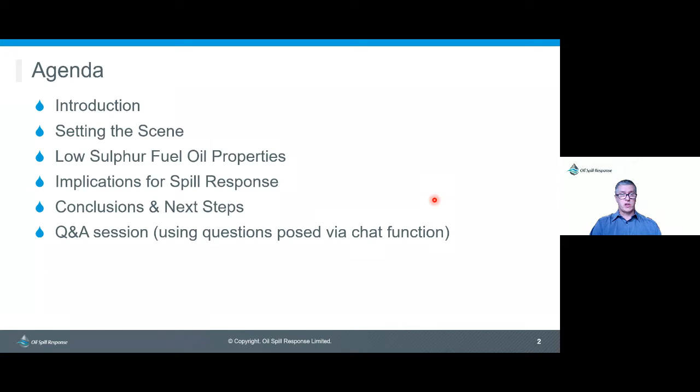Good afternoon, everybody. My presentation is based on 6 different parts. I'll give you a very brief introduction to start off with, say a few words about OSRL before setting the scene. And then moving on to the main thrust of the presentation, which is talking some more about the low sulfur fuel oil properties and also the implications in terms of spill response. We'll then wrap up with some conclusions and next steps. I've put the questions at the bottom there, but we'll take questions after all of the presentations at the end of the session. So thanking you in anticipation.

Just a very quick introduction to oil spill response, just to say a few words about OSRL in the introduction, but also to look back at the first webinar that we gave back in November. This is actually the second webinar that's been organised by OSRL. The previous one included an excellent presentation by Sintef that explained the weathering properties of new generation low sulfur fuel oils based on work that had been undertaken up to that point. And it was clear from the ensuing discussions that there was a lot of interest in the topic and certainly a lot of questions. What we'd like to try and do is build up from that previous seminar, but in a sense also take a step back and look more closely at the properties and characteristics of low sulfur fuel oils based on data that's been gathered through 2020. I hope you find today's webinar instructive, informative. This is very much about dialogue and collaboration, and hopefully we can continue in that spirit.

Just a very few words about oil spill response. I think most of you probably know who we are. We're the largest international industry-funded cooperative out there, owned by the major oil and gas production and transportation companies.

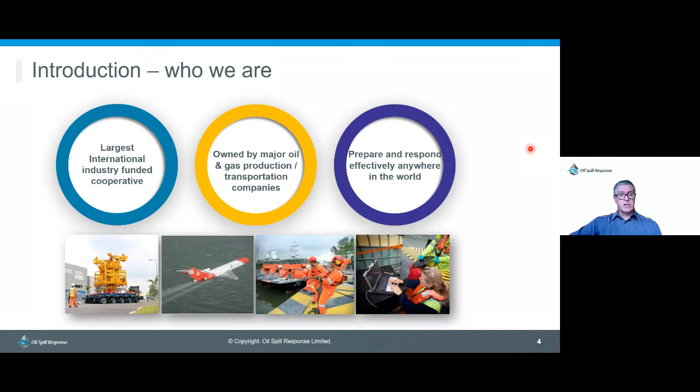Now, as I mentioned earlier, this is the second webinar, but before we go any further, I just wanted to acknowledge that there have been some other very good webinars out there, and I'm thinking particularly of those organised by the UK and Ireland Spill Association that focus on the MV Wakashio, the spill in Mauritius. There were some very good guest speakers indeed from CEDRE, amongst others. So I just wanted to highlight that there's some other good stuff out there as well.

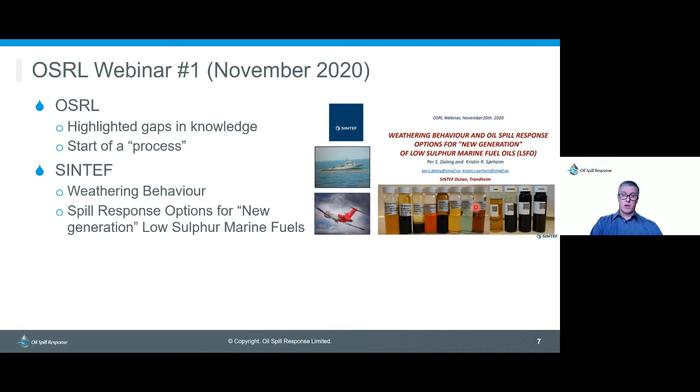In the first webinar, OSRL and SINTEF presented, and I'd like to draw on 2 specific things from that first webinar. Firstly, what we're talking about when we refer to low sulphur fuel oil. This is a slide that I borrowed from Per Daling's excellent SINTEF presentation in the first webinar, so thank you, Per. This basically shows that when we talk about low sulphur fuel oil, we're not talking about one single thing.

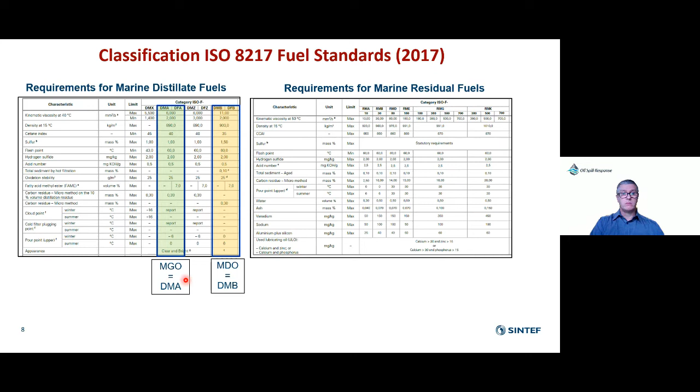On the left-hand side here, you can see the different marine distillate fuels that can be found. On the right-hand side, we have the marine residual fuels. When you think of marine gas oil, marine diesel, you can see where they sit within the distillate fuels. And when we think of the heavier, more traditional heavy fuel oils, the IFO 180, IFO 380, this is where they sit in the grand scheme of things on this side of the residual fuel oil specification.

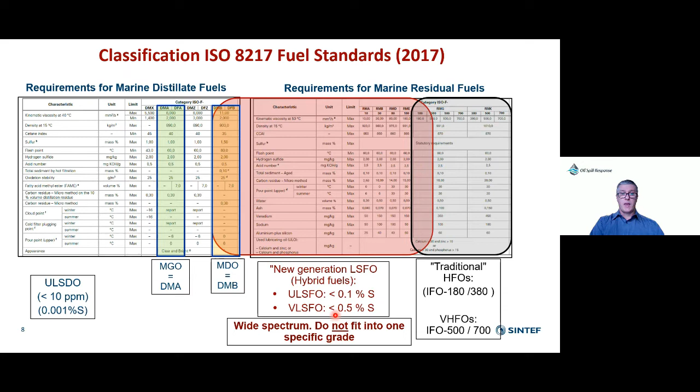But when we talk about the new generation low sulphur fuel oils, we can see what a broad spectrum, what a wide range this potentially encompasses - we're talking low sulphur fuel oil, ultra low sulphur fuel oil and very low sulphur fuel oil here. Clearly you can see it's not a single entity, not a single thing, and not one amorphous substance, as we can see from that particular slide.

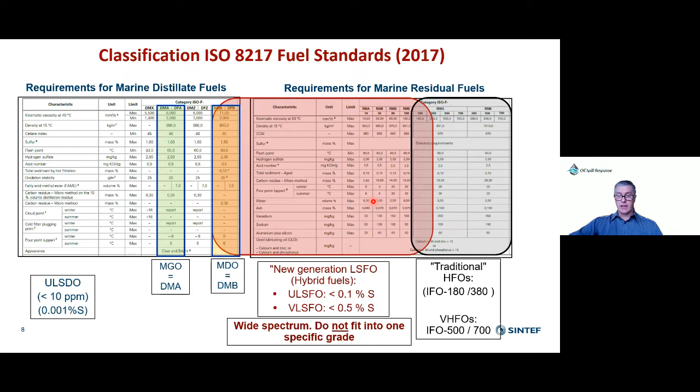The other thing I wanted to show you was that in the first webinar we had many questions, and this is a collection of those questions. I wanted to reassure people that your questions don't just disappear into a black hole - we do make note of the questions. Obviously we try to answer as many as we can during the webinar, but there were so many last time that wasn't possible. I went through all the questions and was able to break them down into 4 different categories: questions about response, questions about behaviour, questions about environmental impacts, and other. Most of those other questions related in some way, shape or form to collaboration, and clearly that's what we're trying to do in this series of webinars, is to build upon that.

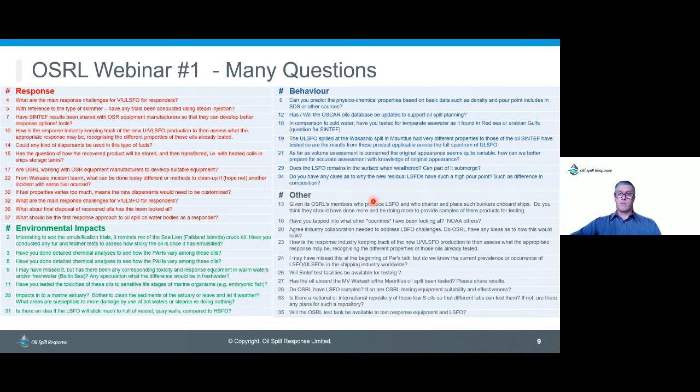Now, we've tried to take account of these different questions in my presentation, but also that's one of the specific reasons why we're so pleased to have the Norwegian Coastal Administration and Cedre talking about the work they are currently doing, because it does touch upon all of those subject areas. So I just wanted to say that before we get into the main thrust of the current presentation.

Okay, so what I'd like to do now is just set the scene and establish, when we talk about low sulphur fuel oil, how big a deal, how big an issue is it? In terms of volumes, there are various figures from different sources, but a figure I found from the International Energy Agency was around 221 million metric tons per year.

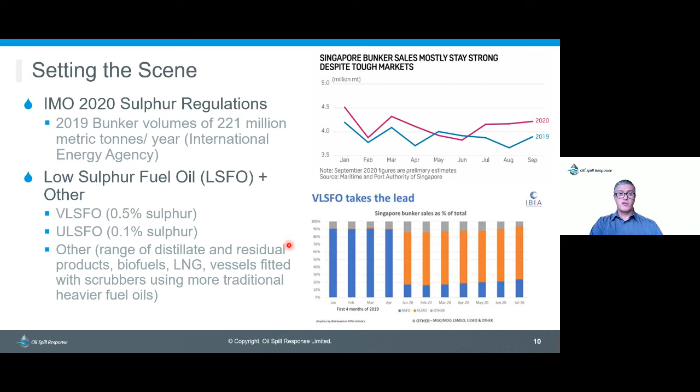But let's not forget, and this is something we need to be mindful of in terms of spill response and preparedness, that there are other fuels that could be carried as bunkers. This presentation is more about low sulphur fuel oils, but from a holistic point of view, we shouldn't forget there are other more traditional heavy fuel oils still carried, because vessels could be fitted with scrubbers - other means of compliance with the sulphur regulations introduced in 2020. So it's just to make sure we keep our eye on the ball, that we are prepared for all scenarios.

I'd like to now talk a little bit about the properties and characteristics based on the results we've collected through 2020. I'd like to pass a very big thanks to VeriFuel, Rob Leventhal, who very kindly shared a lot of data with us and was very sympathetic to my numerous requests. So thank you to them.

Basically what we have here is I focused on some of the parameters that are of particular relevance from an oil spill perspective. The tests are according to ISO 8217, and as we supposed, the results have confirmed there's a very broad spectrum of results and properties with the very low sulphur fuel oils. I've concentrated on three parameters here: viscosity, density, and pour point. We have information for very low sulphur fuel oil, but I've also included some information for high sulphur fuel oil and marine gas oil, just as a comparison, for context.

I'm sure most of you know what these properties are, but viscosity is basically the internal resistance to flow - how easily does a material flow, is it liquid or not. The one thing to note is that the viscosity is quoted at 50 degrees Celsius.

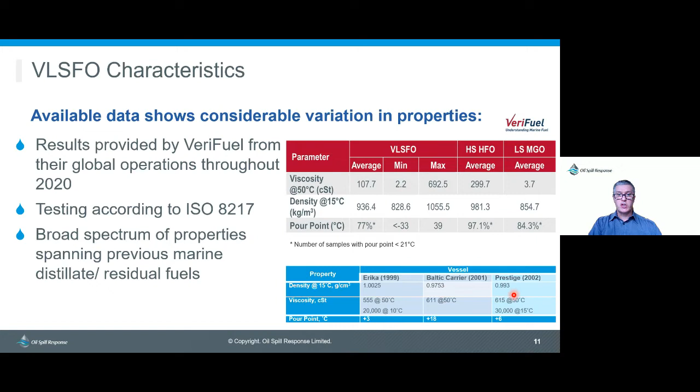But for me, what's also very interesting is the pour points. If you look at the pour point from the Baltic Carrier spill, that's around +18 degrees C. When that actually hit the cold waters off the Danish coast of around 5 degrees C, the oil took on a chewing gum, more viscous character, because it was below that pour point. I point that out because it's a particularly interesting feature and makes it slightly different from the Erika and the Prestige, which had lower pour points.

So I'd like to look at the viscosity and pour point data in a bit more detail. On this graphic I've got a set of viscosity curves on the left-hand side and the pour point data on the right. If we focus first on the viscosity data, we have a series of different suppliers from different parts of the world showing how viscosity varied throughout 2020.

If we start at the bottom left with supplier 4, we can see the viscosity is actually pretty low, pretty stable - you'd wonder what all the fuss was about. There's a slight variation towards the end of the year, but by and large, pretty low, pretty consistent. And the same story with supplier 5 here - a couple of peaks and a bit of an upturn, but generally a pretty consistent viscosity throughout the year.

But then when we contrast that with supplier 1, supplier 2 and supplier 6, we can see a much more varied picture - viscosities from down around 20, but also up over 300. Interestingly, we get the same picture with supplier 2, and also very interesting is supplier 6, because supplier 5 and supplier 6 are both Singapore. But whereas supplier 5 has relatively low and consistent results, supplier 6 has a much more varied picture that can vary considerably from operation to operation. Same part of the world, but a very different picture.

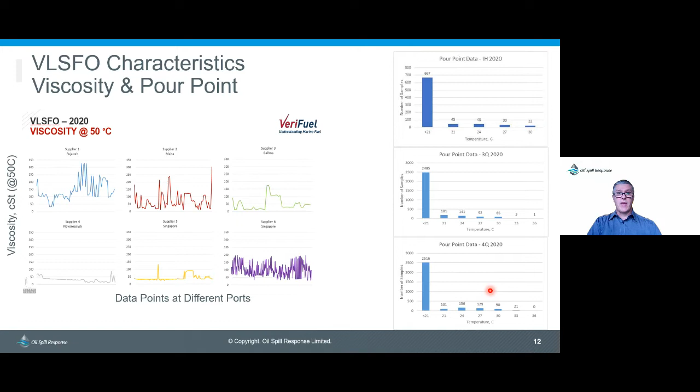Now, when we have an oil spill, the oil starts to undergo a series of processes collectively known as weathering. These can change the amount and character of the spilled oil. Some processes like evaporation cause a reduction in the volume of the oil. Other processes such as emulsification can cause an increase in the volume and also the viscosity of the pollutant.

Basically what's happening is that small droplets of water become emulsified and a stable water-in-oil emulsion is formed. This can in some cases be up to 80% water. So you can think of that as a very increased bulk - you're bulking up the amount of pollutant.

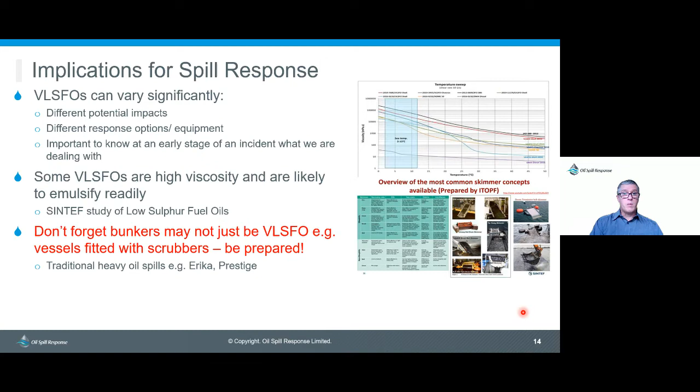So I think that's an interesting point, that there's a lot of work that has been done on these heavy oil skimmers in the past. But what we also know is that many of the very low sulfur fuel oils are much lighter. If we think of the MV Wakashio in Mauritius, for example, we've seen that some of the oils may be low in asphaltenes, and may not emulsify and weather to the extent we used to think about when talking about fuel oil.

In that particular case, the oil stayed at a very low viscosity for many weeks, and the type of skimmers that were working very well were skimmers that were suited for low viscosity oils. So some of the oils will not necessarily be the viscous oils that we used to think of with heavy fuel oils.

And we also need to bear in mind that very low sulfur fuel oils directionally may also be potentially waxy or paraffinic. These are the materials that tend to cause gelling with pour point, so we may find a possible temperature dependence. At warm temperatures the oil will be nice and fluid, it can pour, it can flow, but once the temperature drops, we may find the oil takes on a more solid or gel-like character.

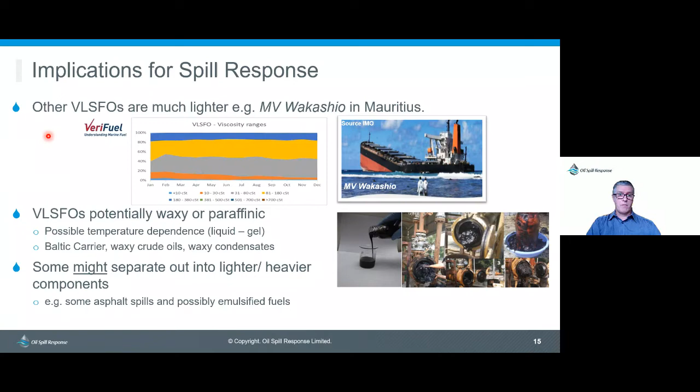All I'm trying to do with this particular slide is highlight the variability. They're not all the same. So that's, from an oil spill response perspective, something we have to take into account.

Now, if we think of containment and recovery, we've already seen that the very low sulfur fuel oils could be very different. You'd want to know at an early stage what you're dealing with, because you want to know which tools from the toolbox to apply. Not all skimmers work with all oils, so which type of skimmer would you need to use? Would you need to worry about viscous oil transfer or not? That will be very much determined by the viscosity of the oil and how it weathers.

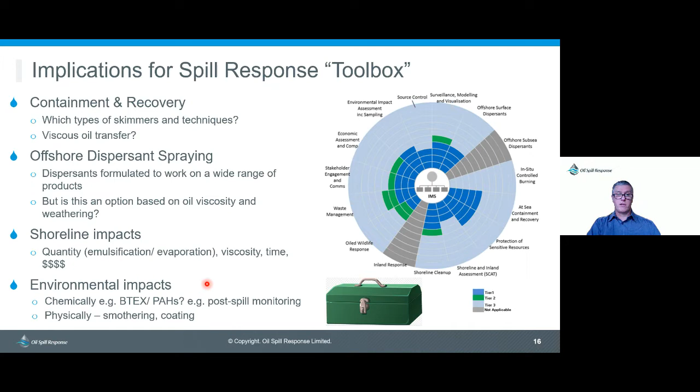So in conclusion, are all very low sulphur fuel oils the same? No, definitely not. Definitely not a case of one size fits all, and I think it would be wrong to adopt such an approach. I think we do have response tools in the armoury, but we need to know which ones are most appropriate, and of course we would be guided by NEBA and SIMA.

I think this second bullet point is very important to bear in mind, because if you have response inventories, if you've got equipment, if you've got STS operations, you want to know which equipment you should have and what its range of capabilities are, to make sure you're adequately covered. I don't think we need to start from scratch - we're not reinventing the wheel. A lot of work has been done, for example, with mechanical feeder skimmers.

What we need to do is not make any assumptions. We need to make sure that plans are fit for purpose, and that training and exercises are conducted. But we certainly don't have all of the answers. There's a need to verify, and there's always room for improvement and learning.

The spill that took place with the MV Wakashio, the lessons we can learn from that, for example. And I've found that industry has usually been very supportive.

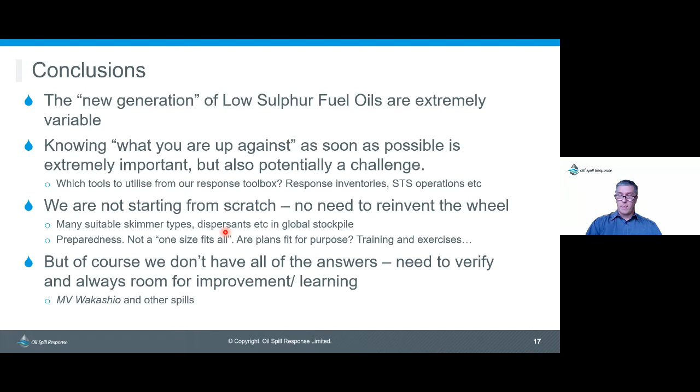In terms of next steps, OSRL's internal knowledge gathering and sharing is currently ongoing. We are very keen to maintain this dialogue and collaboration through this series of webinars, through talking to people like the Norwegian Coastal Administration and Cedre, but also with other governments and industry bodies, because it does have an impact in terms of preparedness and response across the board.

The IMAROS and the EPPR PAME projects are ongoing, and you'll hear a little more about those in the next presentations, as are other potential R&D projects. But as I mentioned, there are lessons we can learn and need to take into account - for example, that Cefas post-spill monitoring I mentioned, and the US work following Deepwater Horizon.

And of course, what we'd like to do is get your feedback after this webinar as to where we should go next. So do please keep in touch with us. Whilst we're not going to take questions right this second, we will take some at the end of the session. But as I said earlier, your questions won't disappear into a black hole. So thank you in anticipation for any feedback and comments you can give us.

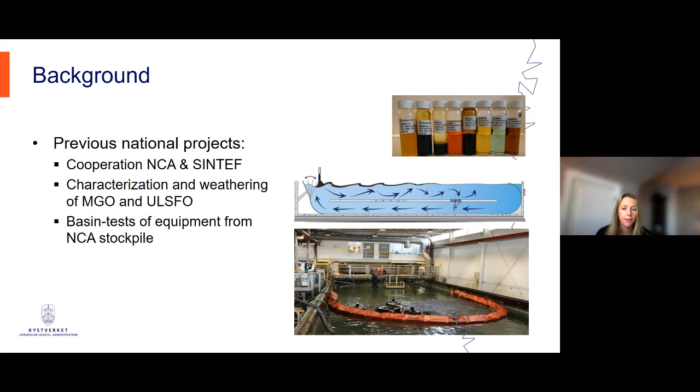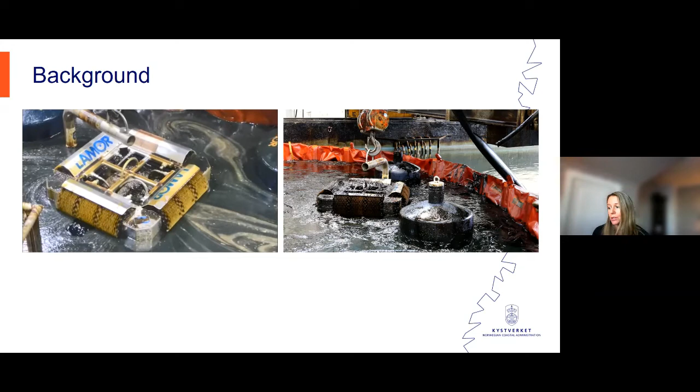So I would like to show you an example from this previous project, testing a brush skimmer in quite cold water in two different ULSFOs. You can see this one, it's flowing nicely into the skimmer. It's quite easy to recover. Everything is working fine. We're not dragging in a lot of water. So this is actually working quite well.

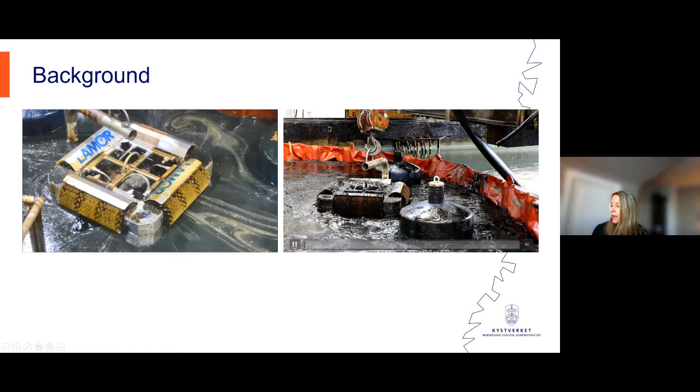On the other hand, there's another product. You can see that one here, and this is a product with a high pour point, so the viscosity should not be a problem for the skimmer. Actually, the pump is pumping the oil, that's not the issue, but the skimmer is actually just digging a hole into a semi-solid oil slick on the surface. So the flowing of the oil is actually the challenge here, and the pour point is really important in this case.

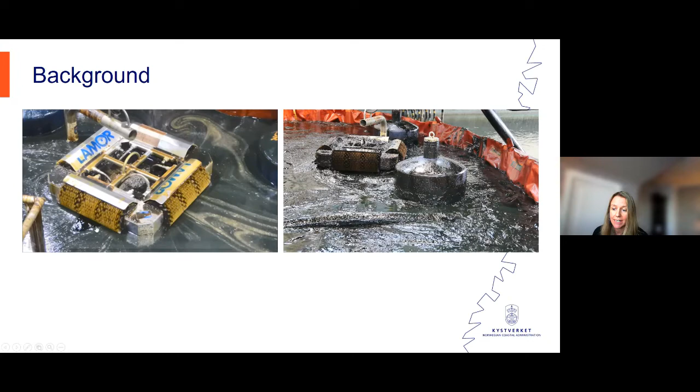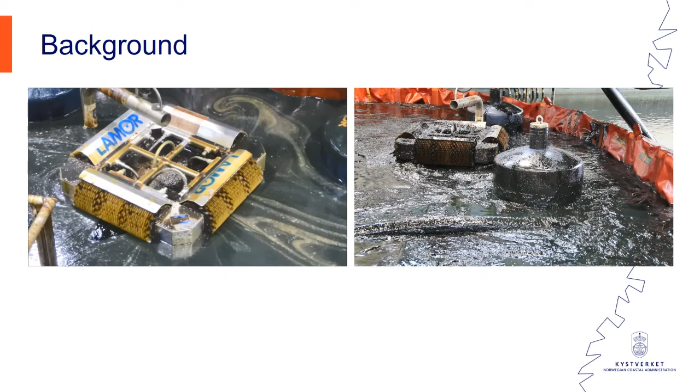Based on the results from these studies, we saw that we were scratching on the surface of something, and we identified a need for more experience and more data.

So this has been followed up in some national projects where we also looked into biodegradation of ULSFO and marine gas oil, shoreline interactions, and currently we are doing a little project on shoreline response where we test the efficiency of different washing techniques. This is a joint project between SINTEF and NCA, and it's about testing methods for cleaning on rocky shoreline involving also different cleaning agents.

However, it became quite clear that we cannot answer all our questions alone, so we wanted also to do some international collaboration on this subject.

One of the projects that we have taken the lead on is the project New Low Sulphur Fuels, Fate and Behavior in Cold Water Conditions. This is a project that is hosted by the Arctic Council and funded from there. Both PAME and EPPR are involved in this project.

Most Arctic states are engaged in the project. In addition, some observer states like Germany, China, Korea, and Singapore are participating. The objectives of this project is to identify the relevant fuel oils, which fuels are used in the Arctic, and also get a picture of the variability, and also, if possible, come up with some recommendation to the oil composition and also with regard to the environmental properties.

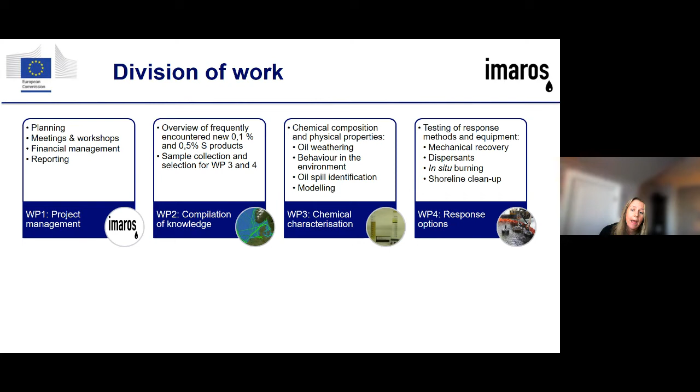This was planned as a 2-year project, but due to the situation this year, we are now working from the perspective of 6 months prolongation of the deadline of the project. We are now well into 2021, and of course the project management goes throughout the project.

The second work package with compilation of knowledge will be finished by this summer. We've started the chemical analysis part that will also continue until 2022. And the fourth work package, well, it will start this spring, but the main work will be undertaken this autumn and in winter 2022.

And we still hope to be able to have a final stakeholder meeting that is planned at the end of the project at our project partner in Malta, and that will be open also for interested parties outside the project group.

A little bit more detail on the work packages. Project management is my responsibility, and it basically speaks for itself—it's planning, meetings, workshops, reporting, finance. But the most important part, I think, is the cross-cutting activities in order to make the work packages fit nicely together and to put all the pieces of this big puzzle together.

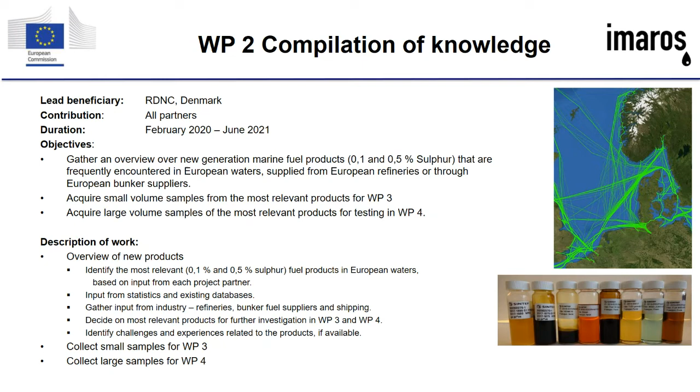So the chemical characterization—I think it has been made very clear how important the physical and chemical properties of the oils are. We will also look into oil weathering and toxicity in the water column.

Identification will be part of this work package, and also modeling. We don't want to create any new modeling tools, but we want to make sure the results from the projects are presented in a way that they can be used in already existing decision support tools, and make some recommendations with regard to best practice for modeling these new oils.

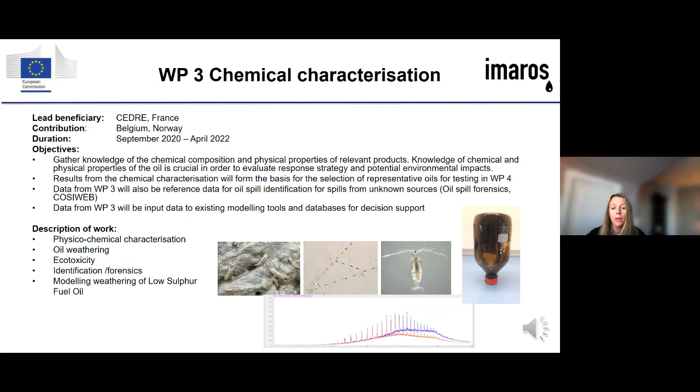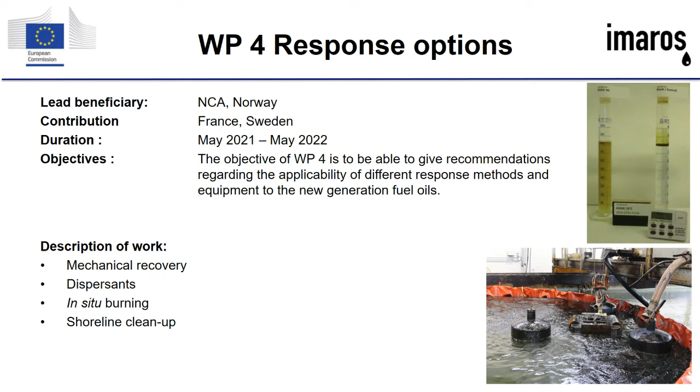Work package 4 is response options. We're looking at the whole toolbox: mechanical recovery, dispersants, in situ burning, and shoreline cleanup. Mechanical recovery is the main emphasis, and dispersants and in situ burning will be done on a laboratory scale.

I perfectly agree that there are already a lot of tools in the toolbox, so we don't have to reinvent the wheel, but the idea here is to identify which concepts work and what are the limitations, and identify possible adjustments that can be made in order to handle some of these more challenging products in a better way. It is not about rating one equipment up against another, but to identify the concepts that should be considered.

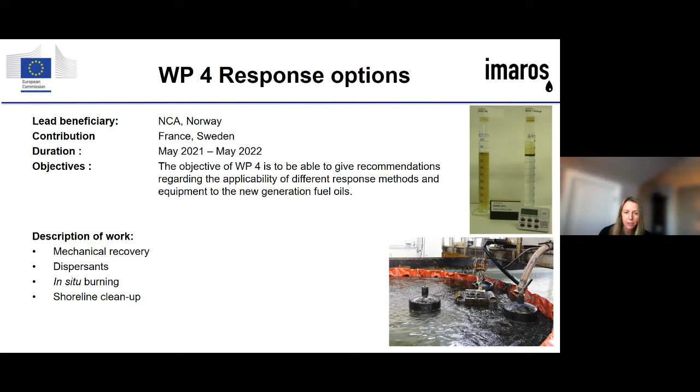Okay, and finally, sample selection. The idea of the IMAROS project is to start with a broad range of samples, and we will soon hear some results of the initial chemical analysis of these small samples that have been gathered in the project.

This seems maybe a simple task, but there are a lot of considerations to be made. Of course, the availability of the desired volumes might be an issue, but there are also batch variation and blended products, and we've seen that variability is a great issue here. So that needs to be taken into account.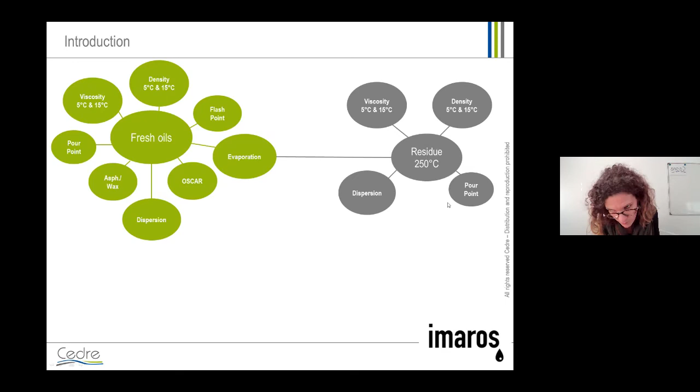So we decided to carry out additional tests compared to the initial ones. This means that on the residue from the evaporation, we decided to characterize it in terms of viscosity and density, and also in terms of pour point and dispersion. This sample is really important because it approximately corresponds to the maximum evaporation at sea. Additionally, we also tried to form emulsions from this residue with 50% water content, and again we characterized it in terms of viscosity, density and dispersion. So with all this data set, we can have a good estimation of the behavior of the oils, their weathering, and it can give good insight into response strategy.

So here is one of the conclusions of the SINTEF report, where they worked on 3 different LSFO, and the conclusion was that they showed a wide span in physico-chemical properties that likely reflects the different recipes used to comply with the new sulfur limits. So our objective here was to try to collect as big a sample group as possible in order to enhance our knowledge on those products.

So as a first result here, you can see 9 GCFID chromatograms of the 13 products. The GCFID chromatograms are used as screening for the samples, and just based on visual comparison it highlights the major differences between the oils. For those not familiar with this kind of graph, on the x-axis you have the retention times, so compounds with low boiling points, light compounds, are located on the left part, and bigger or heavier compounds are located on the right part of the graphs. On the y-axis you have abundances.

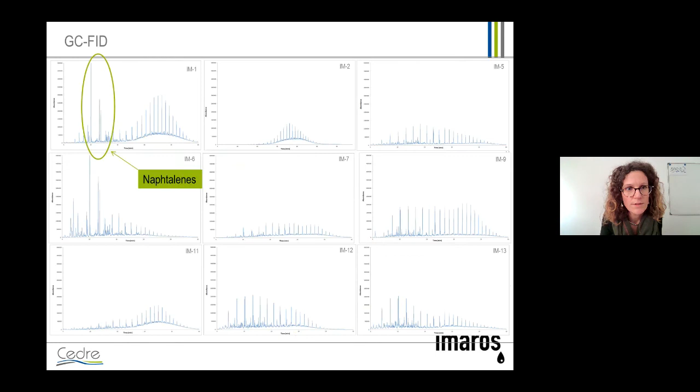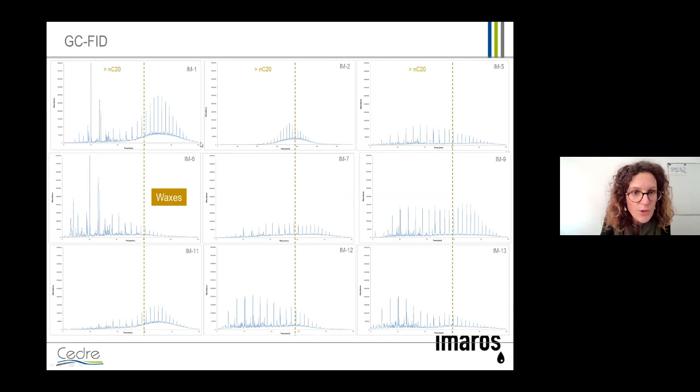So it's the same, you can see that for some samples you have quite a lot of waxes, and for others you do not have waxes. What I should also say is that the limit of this analysis is that with GCFID, you cannot measure the very heavy compounds because it stops at around 35, 36 carbons. So it means that you are missing one part of the analysis.

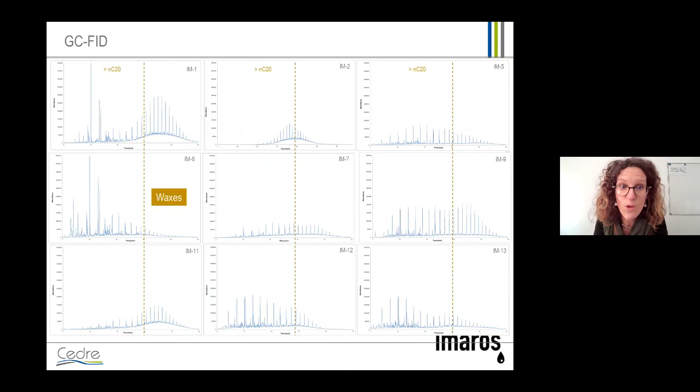You do not know if you have a huge amount of heavy component, and so these graphs just allow us to screen and see the different patterns of the oils, but they cannot explain by themselves the total behavior of the oil. So it was just in order to see that oils are definitely different.

Now, if we focus on the wax and asphaltenes, here are represented the waxes and asphaltene contents of 12 of the 13 samples. We are still waiting for one result. You can see the high variability just on those 2 parameters. Asphaltenes are ranging from 0.4% till 4%, while waxes are ranging from 5% till 26%.

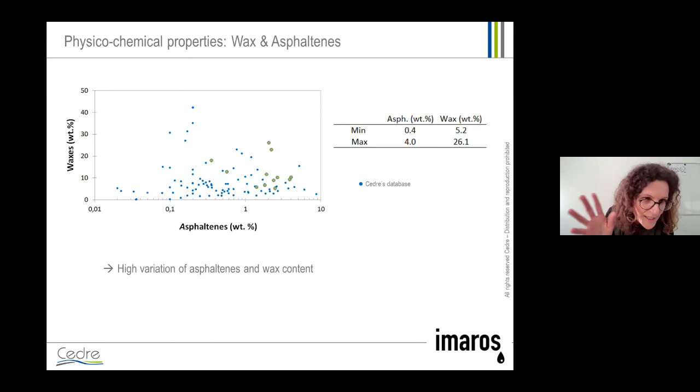We have overlaid the IMAROS dataset onto the Cedre internal database that we have on around 80 samples. So the blue dots here are products already studied at Cedre. They are mainly crude oils, but not only. We decided to show this graph just to see that IMAROS samples are kind of lost in the middle of the crude oils, I would say. So actually, the LSFO are very, very variable.

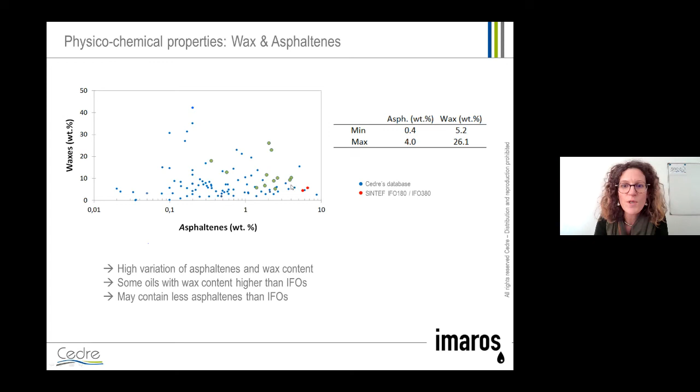We have added here two samples from the SINTEF studies that are the heavy fuel oils. Those points just allow us to see that maybe the LSFO are in majority more waxy than heavy fuel oils, and maybe they have a bit less asphaltenes than heavy fuel oils. But I think the most important point is just to see the variability of the samples.

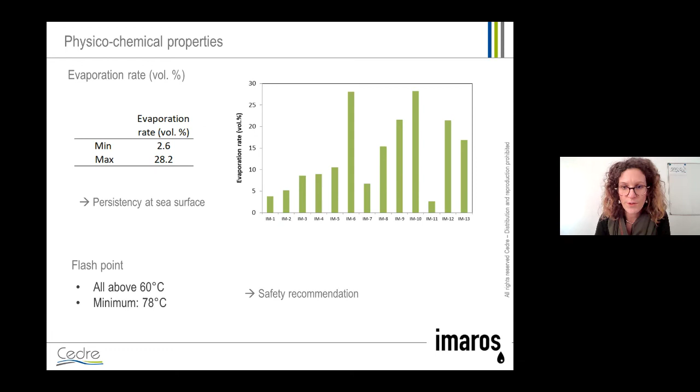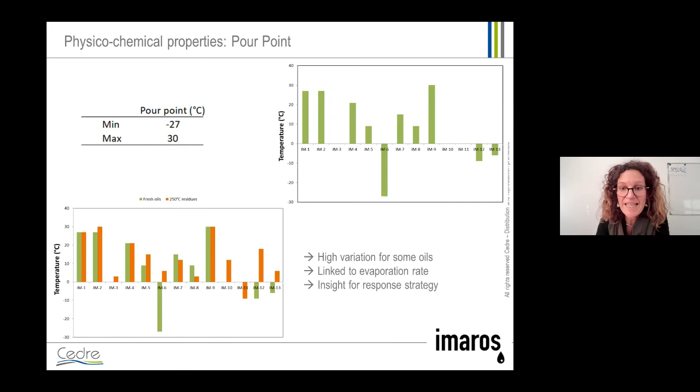What I can say too is that from the weathering we have done at the lab scale, once topped at 250 degrees Celsius, oils are becoming highly viscous. The viscosity increased a lot, and even more than viscous, some oils were just becoming sticky, really sticky. So some viscosity at 5 degrees could just not be determined with the viscosimeter because of really too sticky products. And at 15 degrees, viscosity just increased to very, very high values, up to 250,000 millipascal second. So we encountered for some oils, not all of them, some troubles at the lab for the measurements, but also for the cleaning operations.

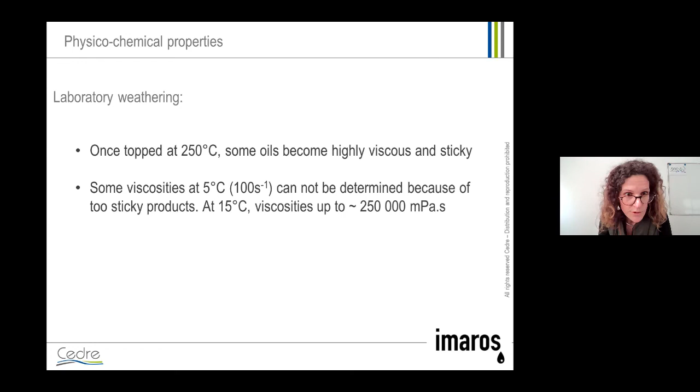To illustrate this point of difficulty for the measurement, I would like to finish on one slide of results. Here are presented data from the dispersibility of the fresh oil. We chose to carry out an IFP test that mimics low energy at sea.

This was only at 15 degrees using a non-commercial dispersant, the dispersant MODEL. The idea was just to have an idea of the dispersibility, because in the next step of the project, when we select the 3 or 4 products to be weathered at pilot scale, we will do a more detailed and deeper study on dispersibility using different tests, IFP and MNS, and using different dispersants.

Here you can see all the samples, and on the y-axis is the dispersibility in percent. The two blue lines at 20 and 50 percent are there to show if the oil is dispersible or not. Below 20 percent, oils are considered non-dispersible. Above 50, they are considered dispersible, and between 20 and 50, they are potentially dispersible.

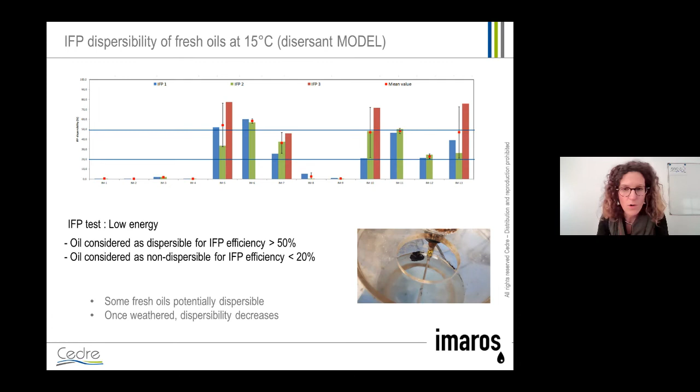Results from the weathered oils are still in progress, but the first results show that oils' dispersibility decreases quite a lot when the oils are weathered.

To conclude, I would say there is definitely a high variability in the physicochemical properties of those oils that maybe reflects the different recipes. For some oils, a high degree of persistence at sea is expected. Some oils also exhibit very sticky behavior that can be difficult to handle in terms of recovery.

The use of dispersants may be limited on some oils but could work on others. Some oils are definitely very viscous and not easy to work with, but I think some other oils look more easy to handle, less viscous, and maybe dispersible. So they are not all very difficult products.

So now the next step for us in the IMAROS project is to discuss all this data more deeply and decide which oils will be tested for pilot scale weathering and ecotoxicity. Yeah, so that's it.

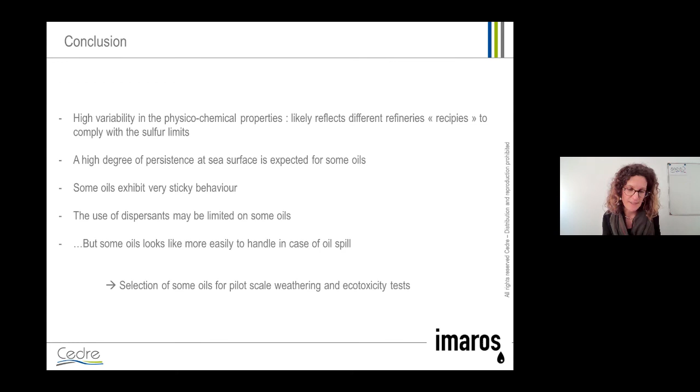There was one question about pour points. I think this is one maybe for you, Paul. Pour points increase rapidly after weathering, why did you select 21 degrees as a temperature of interest? I think we would be interested to look at oils with a pour point of 10 degrees Celsius or even 0 degrees, considering the expected increase after a spill in typical ocean temperature.

To be honest with you, it was a case of taking what data we had available. The data we got from VeriFuel was collected for a different purpose, to look at compliance with the ISO 8217 specification. So we kind of inherited and got what was available. I do have some information at lower temperatures, but in many cases it's just reported as less than 21. So it's not something we specifically selected or requested, it's the way it was actually given to us, and we can only use what is available.

In an ideal world, I'd have had data at every 3 degree point below 21 degrees, but that's simply not available from all inspectors, so we've used what was available. I noticed Per Daling asked a similar question. We do have some data, but it's incomplete. Some inspectors and locations have given data at lower temperatures, but it doesn't give a complete picture. So yes, I have some, but it's a case of making the best use of what we had, which was collected for a different purpose, unfortunately. We're hoping that results from what NCA and Cedre are doing will give us more data we can correlate with the VeriFuel data.